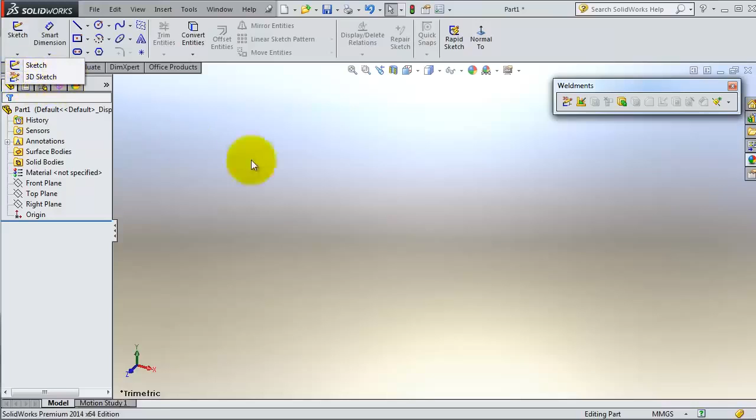So 3D sketching, we worked with it before, but this is the first time I am using it in a tutorial to show you how to use it. The 3D sketch is different than the original sketch. In the original sketch, you are creating a two-dimensional sketch in one of these planes.

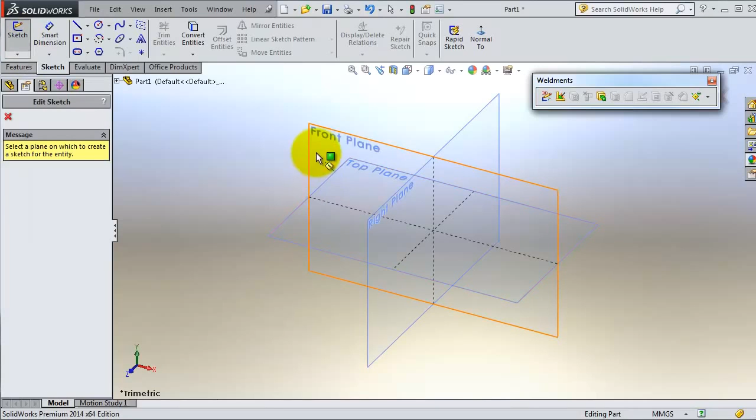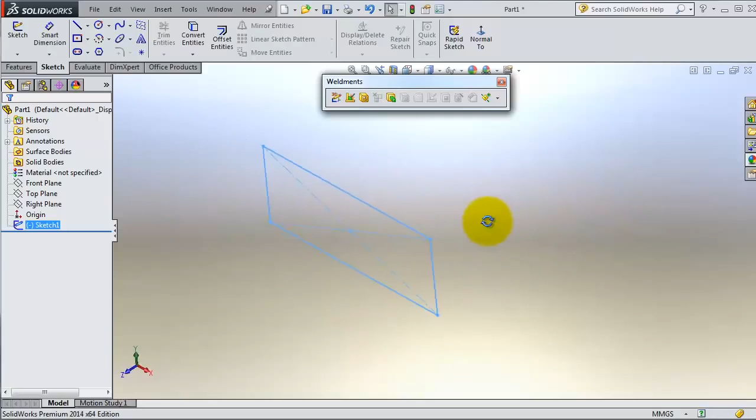For example, let's make a center point rectangle. So you are able to work in this plane. That front plane might be the yx plane. So you're not able to move in the third dimension. But if you want to make a table, for example, and you want to make legs, you need to insert another plane.

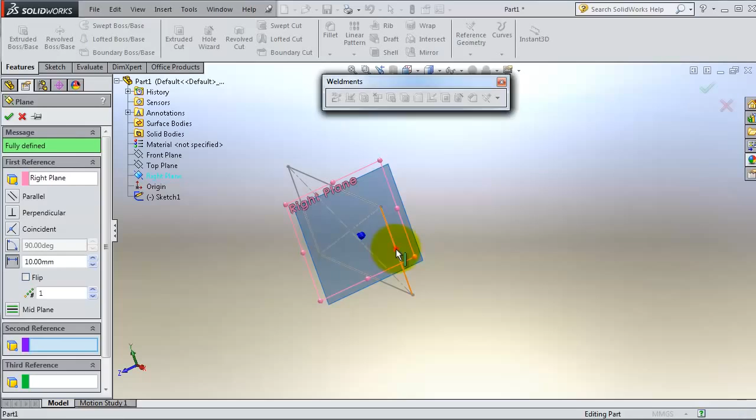So for example, you can go to the feature plane and insert a plane parallel to that line. So let's find a parallel plane. In this case it will be the right plane and this line. We can make it parallel here, and then okay. So we inserted a plane here, then you can insert a sketch on that plane, normal to,

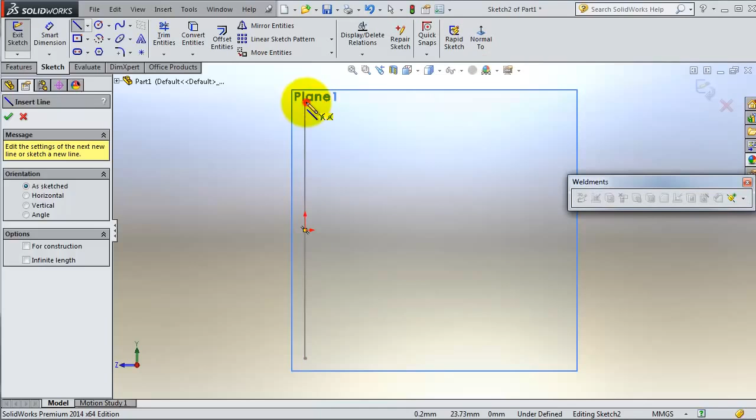and insert two lines. Two lines here and one line here, and they are equal. So exit the sketch, and then the same process on the other side to create that table.

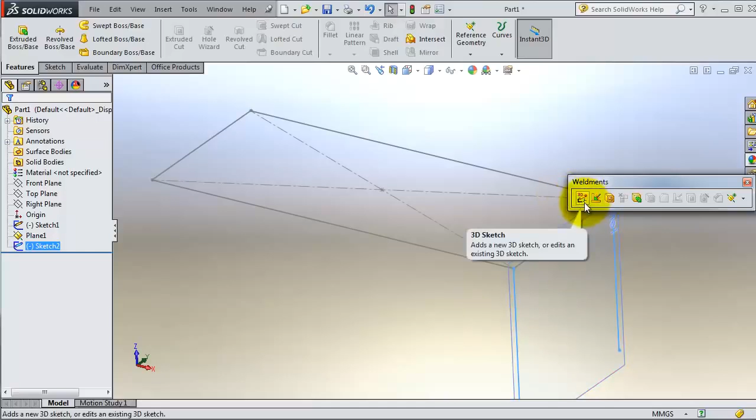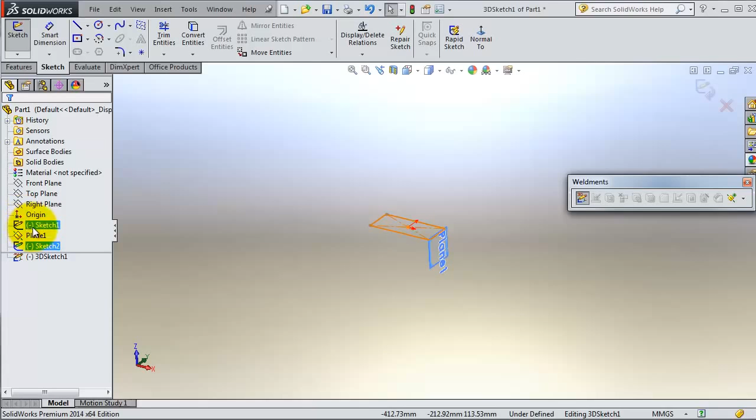So you can imagine how it is many steps to work with this 3D table, but here comes the 3D sketching. It makes this job easier because you are able to create a sketch in 3 dimensions, but it needs some attention when working with it because you need to control the direction. So let's delete this sketch first.

Let's exit this one and delete two sketches and start with 3D sketch. So click on 3D sketch, or from sketch here you have 3D sketch. So now we are in the 3D sketch mode. Let's select center rectangle. We need that to be in the yx.

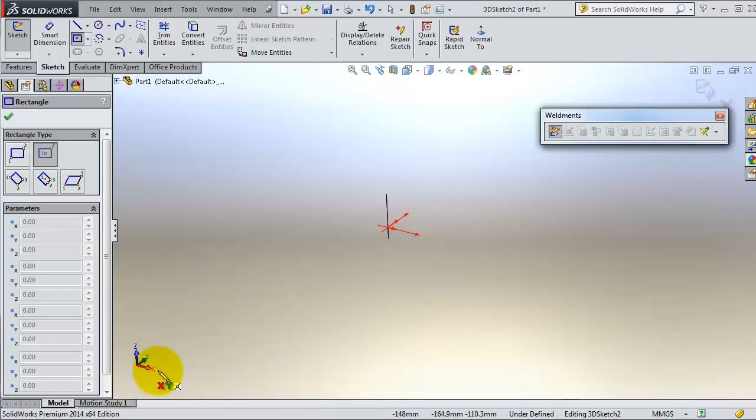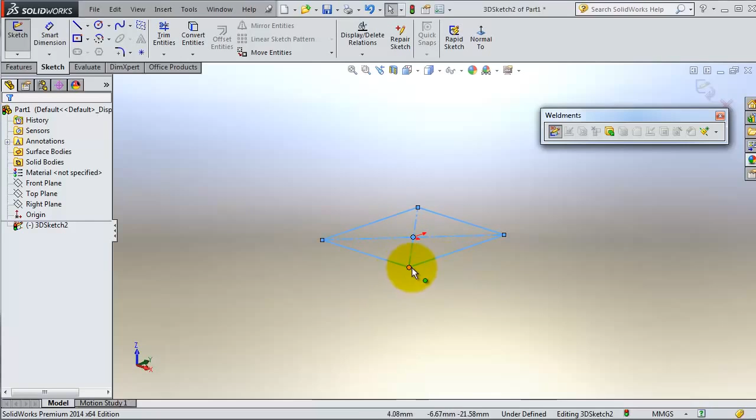You can look at the compass here to have an idea in which plane you are drawing. So now we are in the xy plane. As we remember, when we created a 2D sketch, it was on the xy. And second, when you want to draw a leg, it will be in a different plane. They will be in the zy plane.

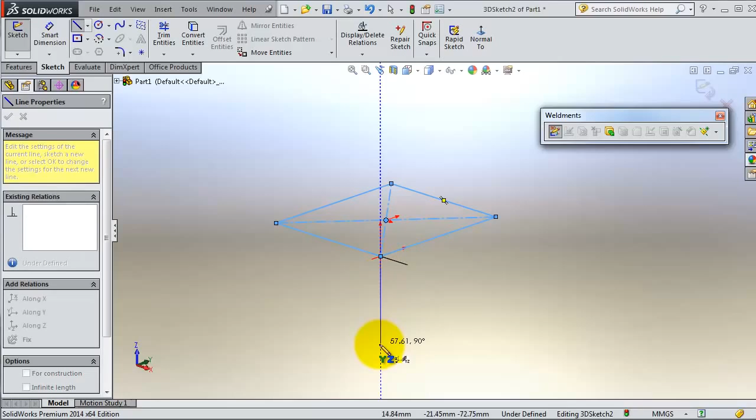So in that case, you need to change that plane by clicking on tab. So now we are in the zy plane. So you are able now to insert the table legs, and you can add an equal relation to them.

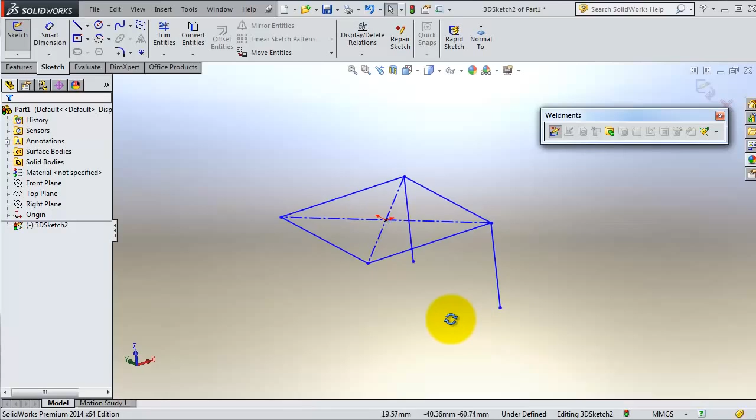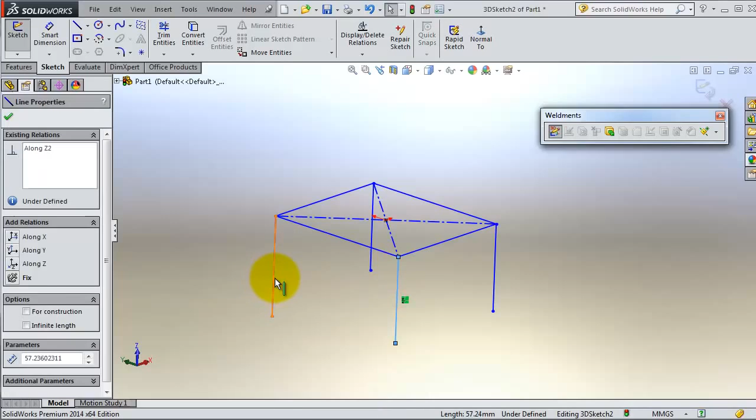And now let's move to the other side. Select line. Now we are in that plane. Make sure that you are parallel to the axis, and then one line here, so you can see it is parallel to the axis, and again you can add equal relation to them.

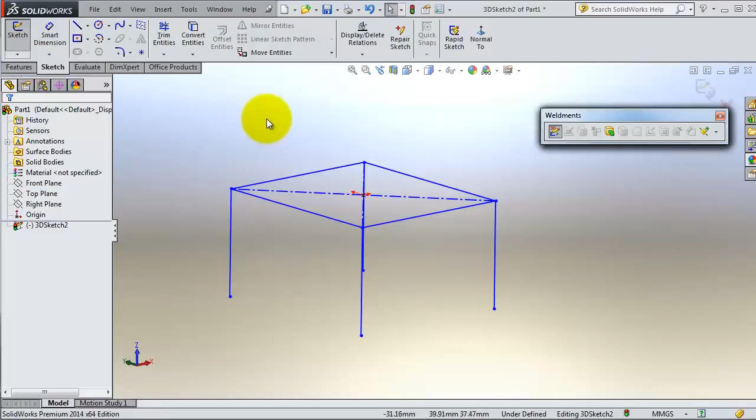So you see, you created that table in only one sketch, which is called 3D sketching. If you want to make this sketch with 2D sketching, you will see it requires many steps in certain planes and so on. So you created that table in a matter of a few minutes.